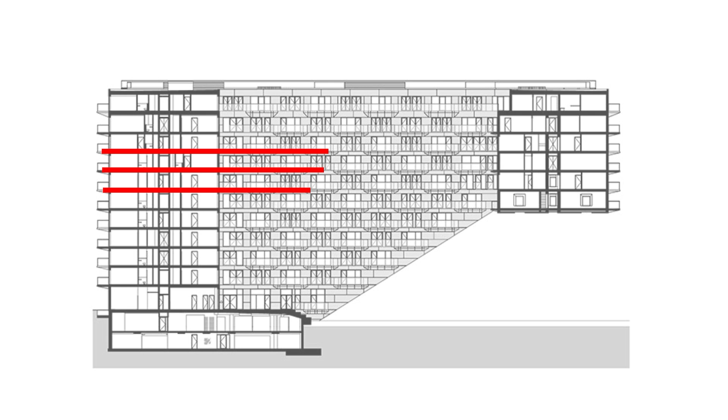Sluishuis features a massive cantilever structure in which 52.2 meters of the total 86-meter cantilevered wing is open without any support below. To support this enormous cantilever spanning 11 stories with relatively short supports, Sluishuis adopted a unique structural system rather than resisting the enormous loads simply through the bending strength of horizontal flanges.

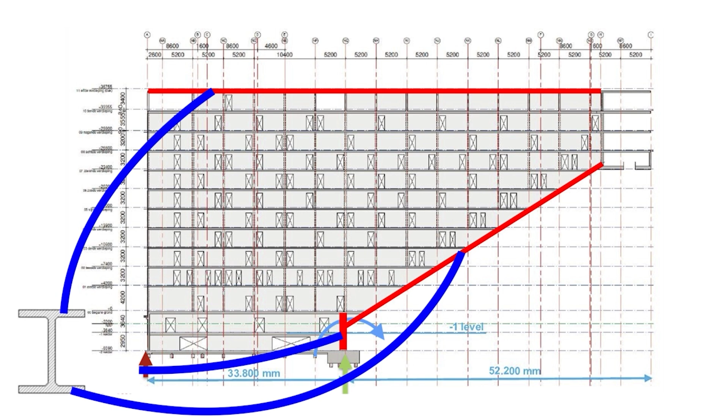This method allows the cantilevered section to behave as one giant H-shaped bending member, where each floor slab acts as the flange and the central double shear wall acts as the web, enabling the entire structure to function as the bending system. In this system, the structure serving as the lower flange is designed as an inclined strut, which provides significant advantages in resisting moments.

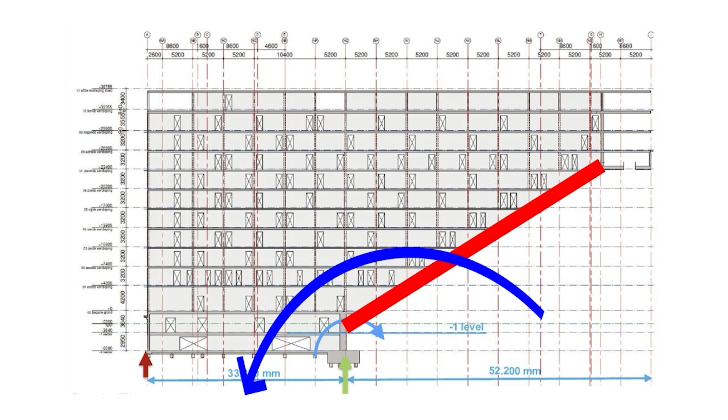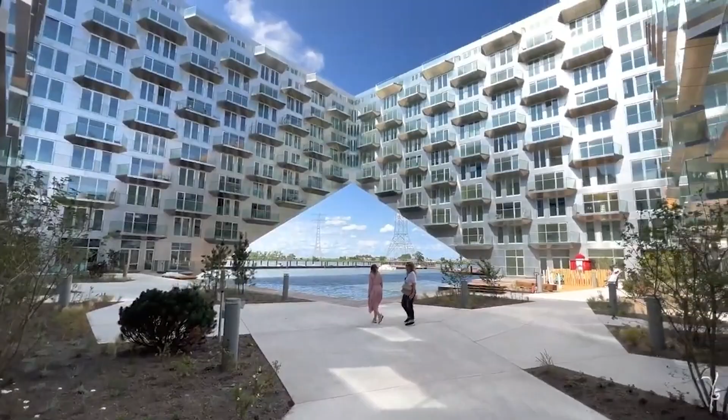While this form was also part of the architectural strategy to create an opening, it affords substantial structural benefits both at the individual floor level and in the overall system.

If the struts in Sluishuis had been merely curtain walls for design purpose, each floor would have had to resist a 5.2-meter cantilever load without support underneath. In lower floors, where cumulative loads from upper levels concentrate, this would have led to intolerable structural burdens.

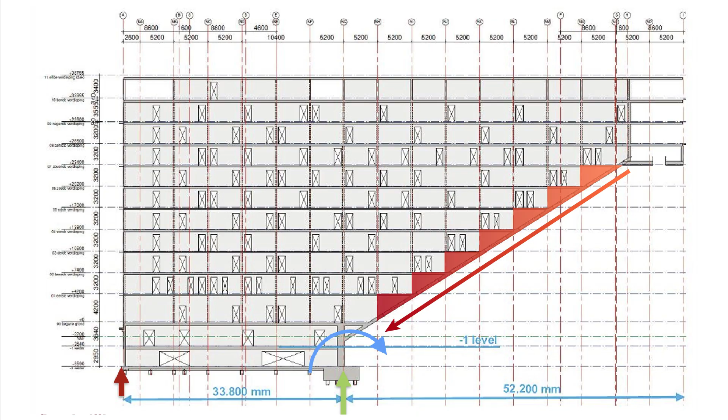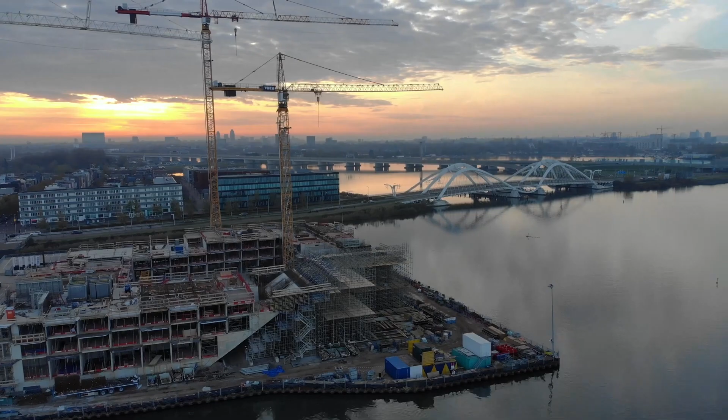Sluishuis employed a distinctive structural approach without wasting the inclined plane by utilizing the slope as an active load-bearing member. The struts are inclined at 31.61 degrees from the horizontal, transmitting loads downward at an angle as both horizontal and vertical forces. Since the struts are part of the cantilever, they inherently act as flexural members.

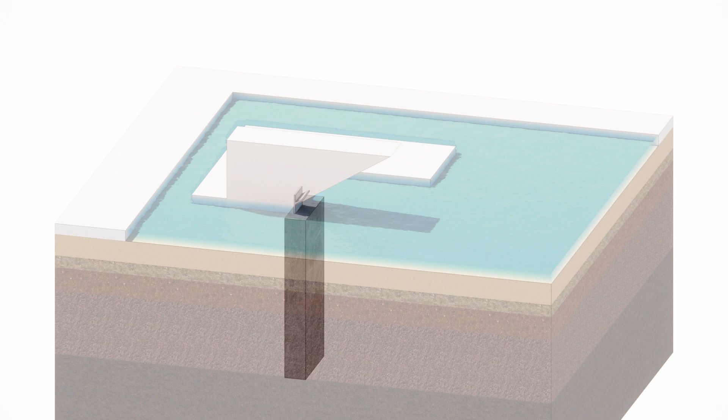However, due to their inclination, they do not rely solely on shear and bending resistance. They also transfer loads downward through axial forces, thereby acting as compression members as well, a hybrid structural role.

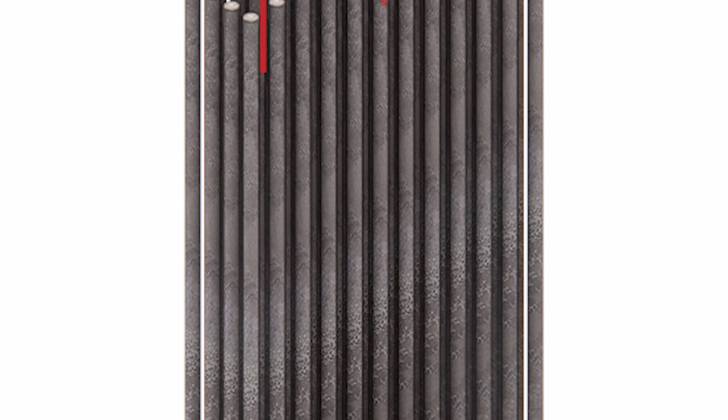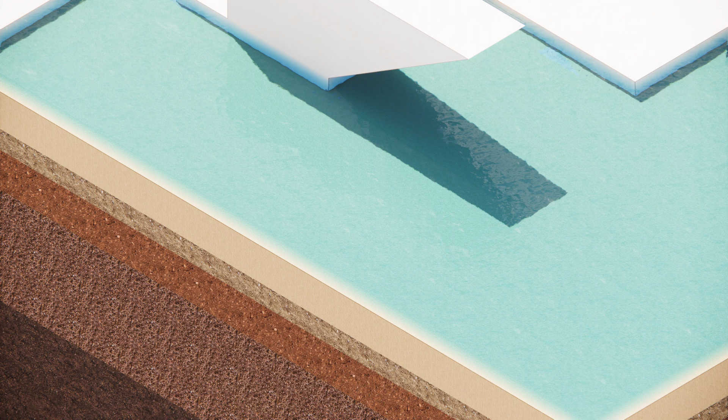The compressive forces and moments transmitted along the struts are further transferred to the massive underground shear walls and footings previously described, which ultimately convey the loads through the compression foundation system composed of steel pipe piles. This forms the load-bearing mechanism that supports Sluishuis' cantilevered section.

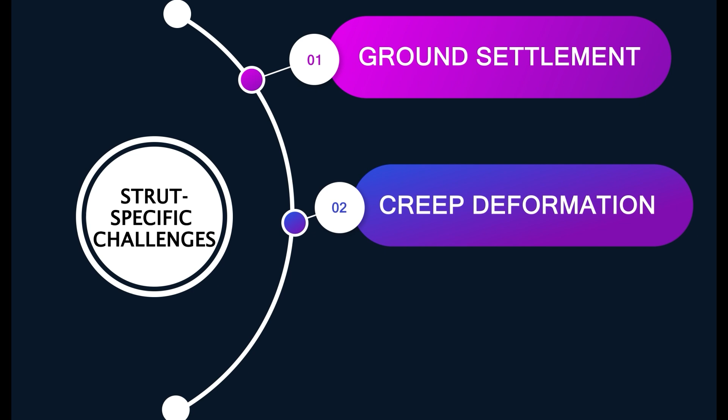While the struts offer significant structural advantages, there are unique challenges, such as ground settlement of the support structure during construction, long-term deformation due to creep, and deflection from self-weight. Careful design and meticulous construction were essential to address these issues.

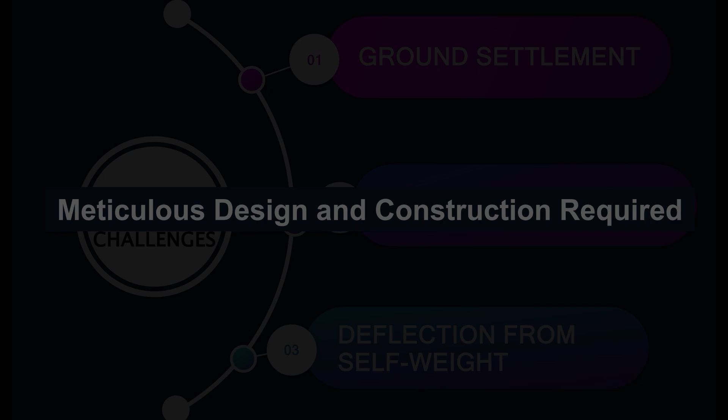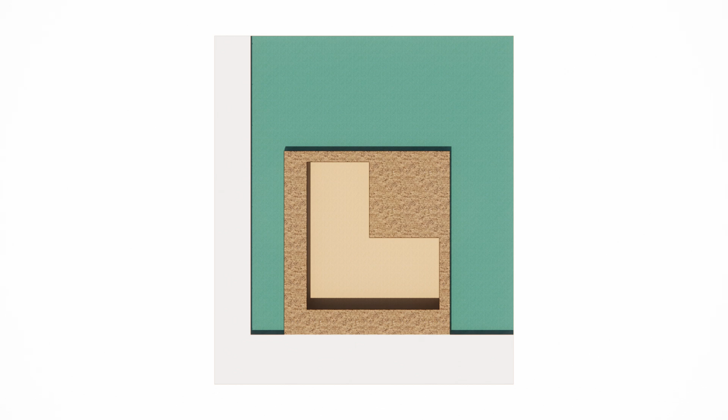Since the cantilever of Sluishuis is located outside the L-shaped underground structure, it was constructed on a temporarily reclaimed ground between the inner cofferdam and the outer cofferdam used for underground concrete placement. As Sluishuis created an opening by lifting a corner of the initially square-shaped site, temporary ground was constructed in the cantilever area and the central courtyard.

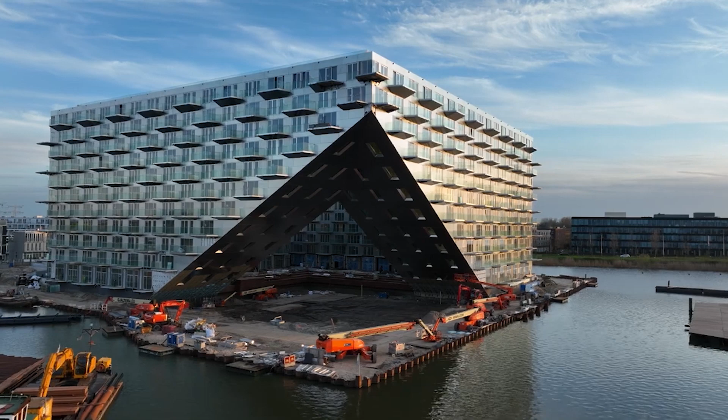This allowed the above-ground structure to be built. This reclaimed ground provided a working platform for casting and crane installation, as well as passages for equipment and vehicle access. Inside the inner cofferdam, a total of 805 precast piles and steel pipe piles were installed.

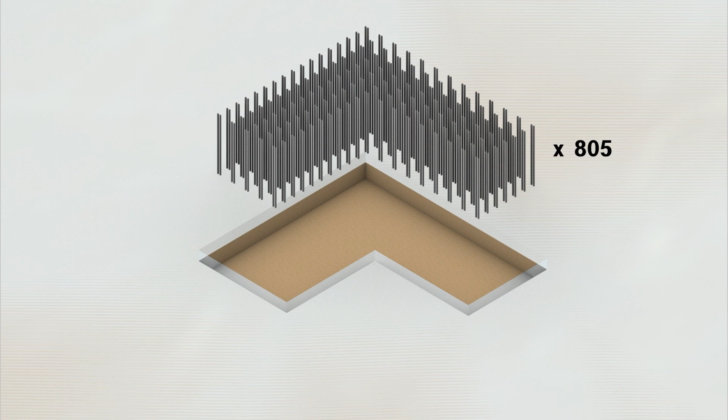Additionally, about 70 temporary steel piles were installed outside the inner cofferdam at the virtual location of the cantilever section, taking into account the upcoming construction process.

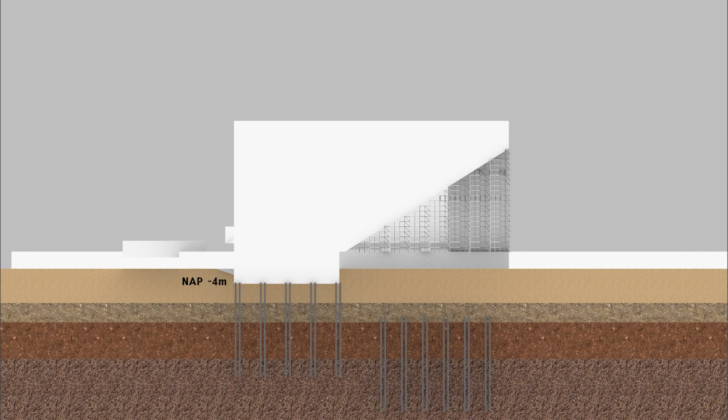While the structural piles installed inside the inner cofferdam were embedded at NAP-4 meter to connect with the B2 basement structure, the temporary piles were installed to withstand the loads during the cantilever construction, with their heads positioned at Sluishuis ground level, NAP -2.2 meter.

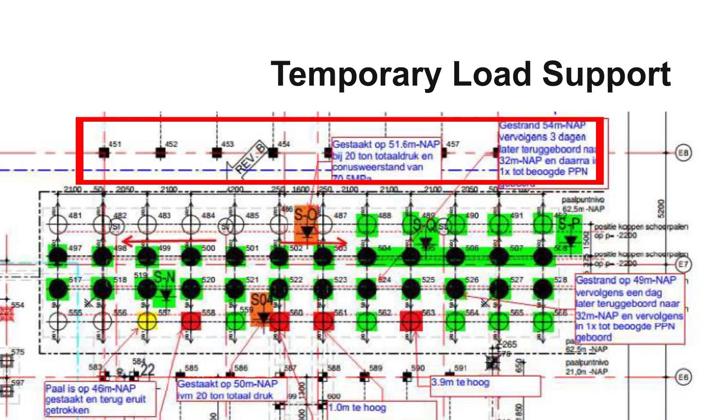These temporary piles were installed at approximately 2.1 meter intervals and were later integrated with temporary structures to support the loads during the strut construction process. Afterwards, sand was reclaimed via barges, completing the temporary ground needed for construction.

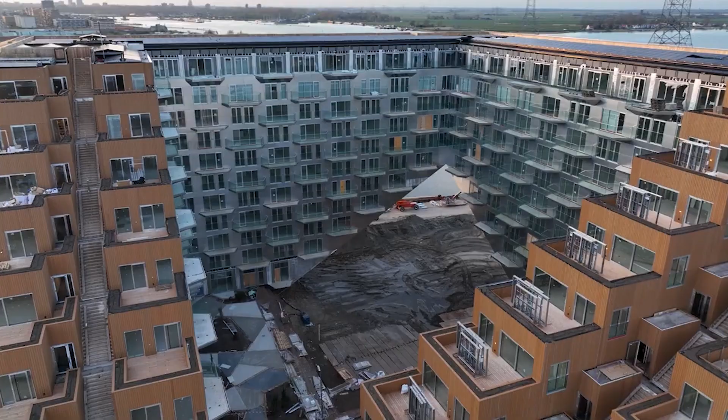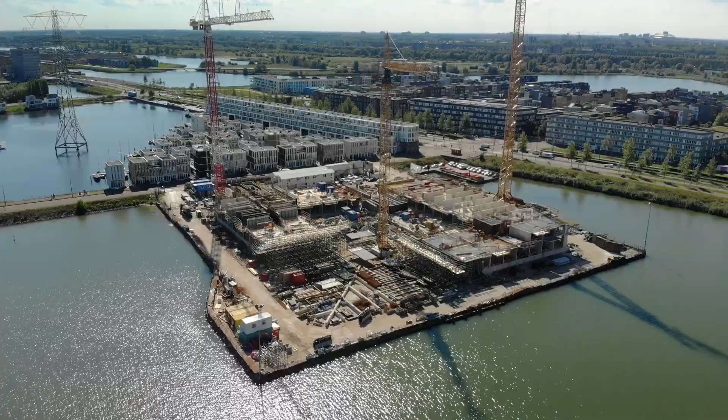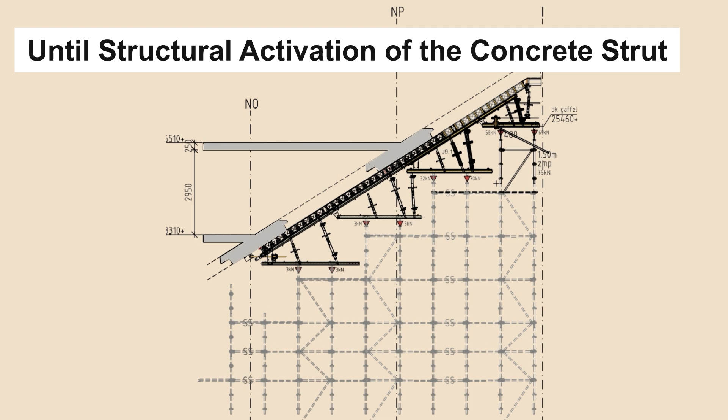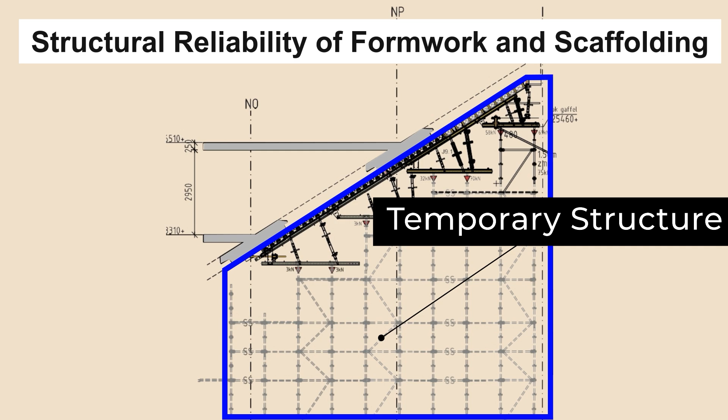To stably transfer the massive scaffold loads supporting the cantilevered walls on the weak ground, a temporary grid of reinforced concrete beams was constructed at the base of the site. Since the formwork and scaffolding had to function as a temporary support structure until the reinforced concrete struts reached sufficient maturity and could act structurally, ensuring their structural stability and strength was essential.

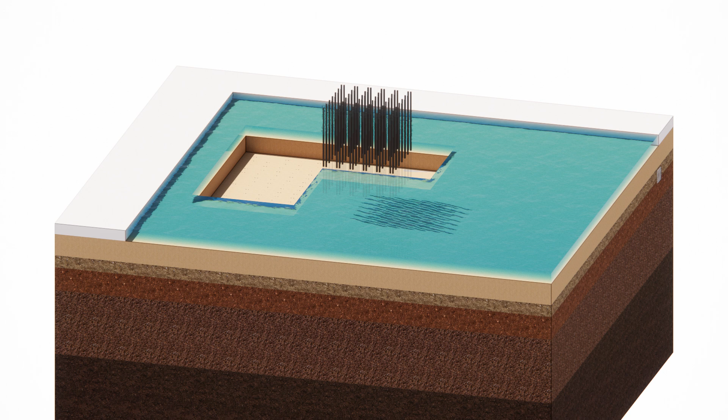However, the soft ground and temporary sandfill were insufficient to bear the loads descending from the scaffolding. Therefore, temporary piles were installed.

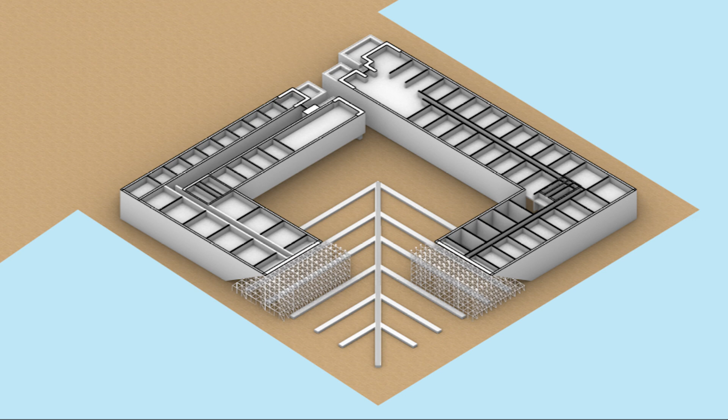To transfer the loads from the scaffolding to these piles, a grid-shaped foundation was cast on top of the previously constructed sand-filled ground, with temporary piles consisting of transverse, longitudinal and diagonal beams arranged in alignment with the direction of the compression shear walls. These beams were arranged in a staggered L-shaped pattern at 5.2 meter intervals, corresponding to the spacing of each cantilever floor, and diagonal beams tied the entire system into a unified structural grid.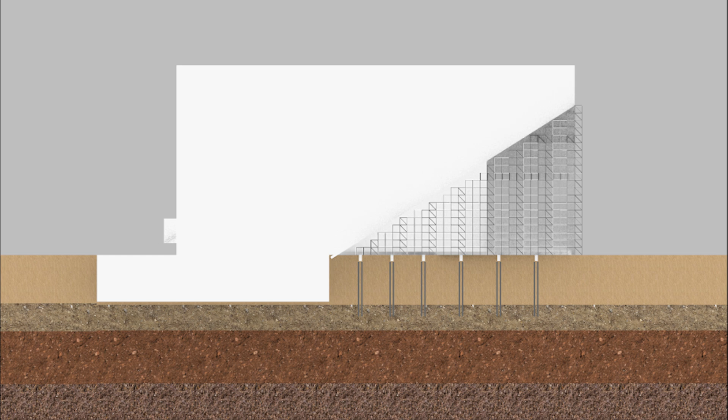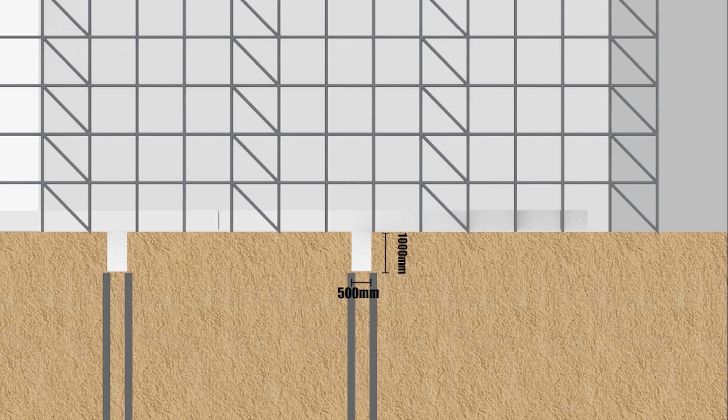This system dispersed the concentrated point loads from the scaffolding over a wide area and transmitted them to the temporary piles. The grid beams were large reinforced concrete members with cross-sectional dimensions of approximately 1000 by 500 mm, cast in place on-site. The beams were laid orthogonally to form a grid mesh, and beneath the two lines of cantilever walls, this grid structure was rigidly connected to the densely spaced temporary pile heads, providing stable support.

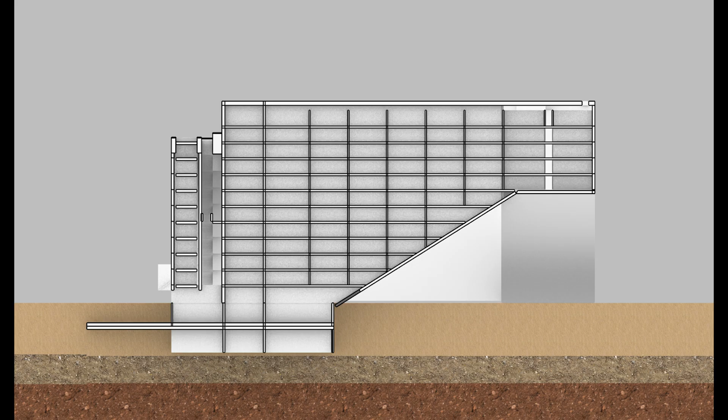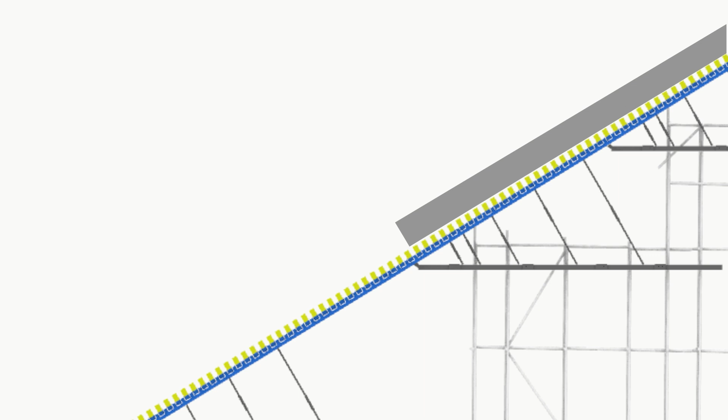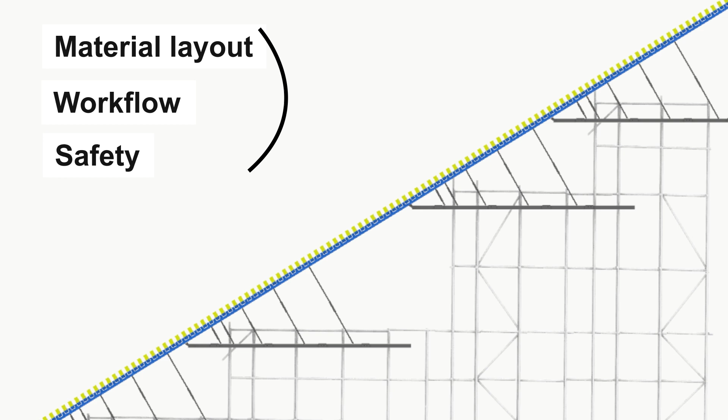The cantilever struts of the Sluishuis were constructed by dividing them into horizontal layers corresponding to each floor and casting them sequentially along these sectional zones. This method was adopted to prevent the possibility of concrete sloping downward due to its self-weight during casting on inclined struts, and to efficiently manage material layout, workflow, and safety in a challenging environment where the inclined structure had to be built without any supporting structure beneath.

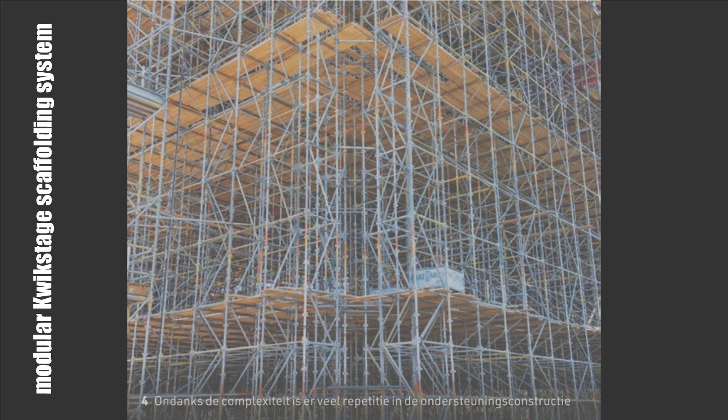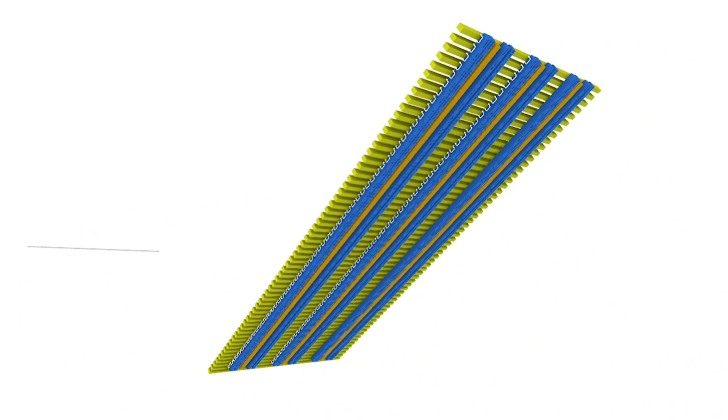In line with this sector-based construction method, the strut formwork utilizes a modular Kwikstage scaffolding system and Doka's Top 50 modular formwork. The Doka Top 50 is a modular system that can form large formwork panels by combining standard components such as H20 timber beams, steel walers, and plywood, depending on site conditions. These Top 50 formwork panels were fabricated to match the shape of the inclined walls and installed on a special inclined frame called the jukan.

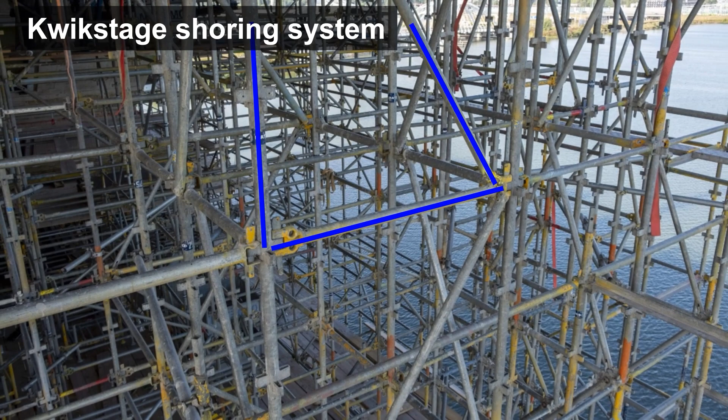To support the cantilever walls, large temporary scaffolding was erected. Unlike typical architectural scaffolding, this served as a shoring structure, a medium to heavy-duty load-bearing system. The Kwikstage shoring system used in the Sluishuis project was a modular scaffold where horizontal and diagonal members can be quickly connected to vertical members.

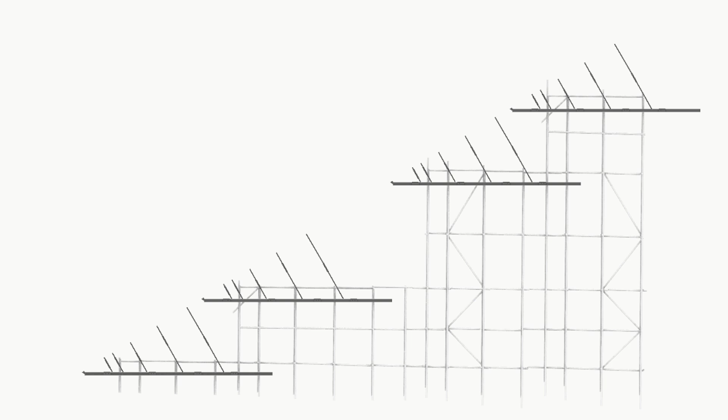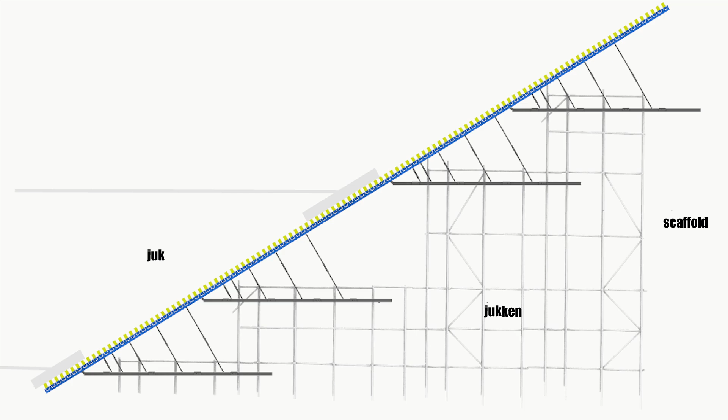Sluishuis employed high-strength Kwikstage components using S355 grade steel for scaffolding members and thick steel pipes to enhance rigidity. As a result, even very large loads could be supported with relatively few scaffolding members, and stability was ensured so that allowable loads did not decrease even with increasing scaffold height.

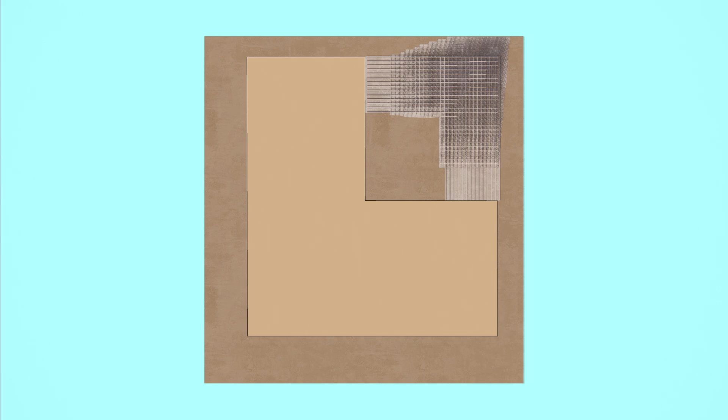This supporting scaffold structure was built in steps, following the shape of the cantilever wall. Scaffold towers were erected in a grid pattern on the horizontal plane, and as they rose upward, some sections were set back step by step to match the slope of the cantilever walls. Since all scaffold members were connected in a regular modular system, a consistent pattern and spacing were maintained throughout the large structure, making it possible to relocate and elevate previously used modules for reuse.

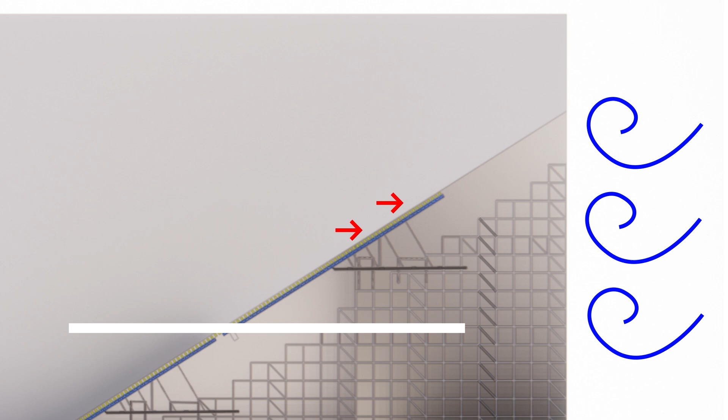Braces were installed throughout the structure to resist lateral forces from wind or the self-weight of the struts, and at the base, additional steel reinforcements and connections were applied to prevent buckling.

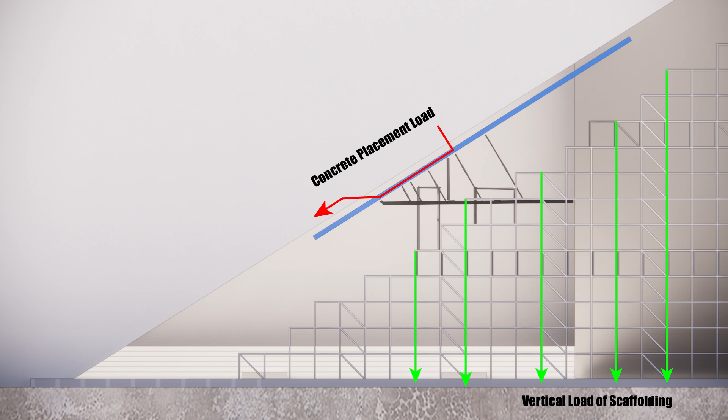Additionally, during casting, the formwork support frame was anchored to the previously cast inclined wall, which enabled the horizontal loads generated during concrete pouring to be transferred to the existing concrete wall rather than the scaffolding. As a result, only vertical loads acted on the scaffolding itself, allowing for stable load support without bending moments or additional settlement. Beneath this scaffolding system, as previously mentioned, temporary reinforced concrete grid beams were installed on top of the sand reclaimed ground to widely distribute the loads.

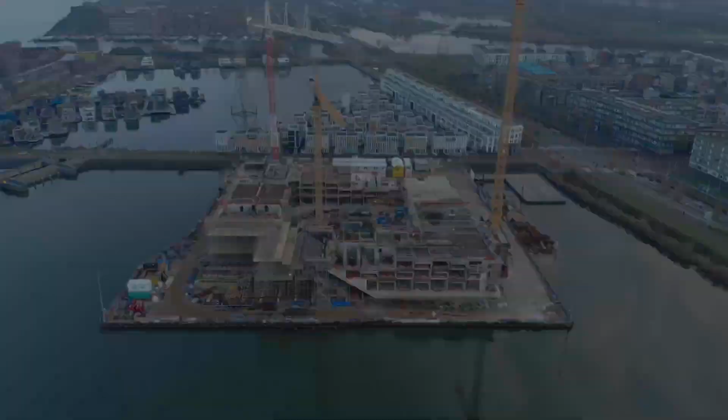By thoroughly reinforcing the entire load path from the foundation to the upper formwork, the structural stability of the scaffolding system supporting the massive cantilever was ensured.

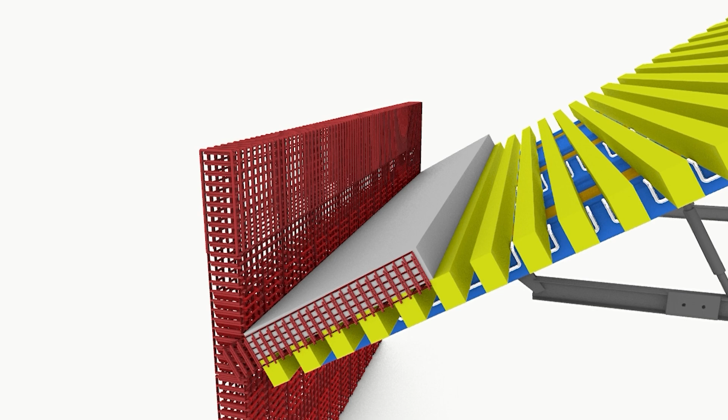Due to the nature of the inclined structure, the concrete was cast in multiple stages to form horizontal layers. The casting process was divided into the slab joint areas and mid-wall segments so that each pour would form a horizontal surface. The internal space of the formwork was sectioned accordingly, allowing the concrete to be poured sequentially in a controlled manner.

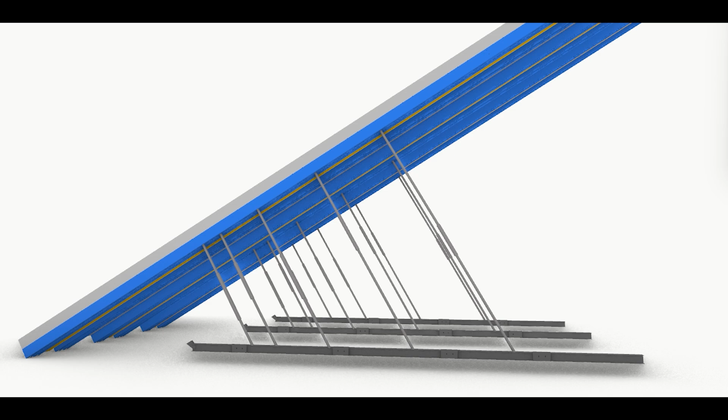This method prevented the concrete from flowing down the slope and ensured stable placement. Furthermore, the construction joints were kept in a moist state to allow for monolithic bonding between pours. Once the lower portion of the wall gained sufficient strength, the formwork was removed.

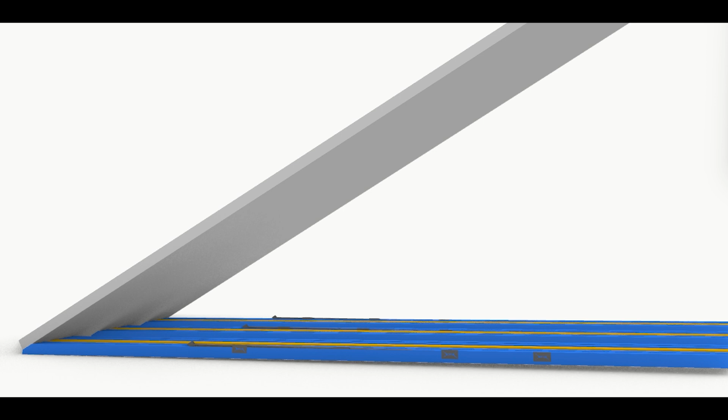This was done by loosening the threaded jack spindles of the jack support frame to create a gap between the panel and the concrete surface. Then, the entire formwork panel was lifted using a crane or similar hoisting device and reused for the next section of the wall.

After lifting the formwork to the height of the next story, the support frame was reassembled on the scaffolding and the formwork was installed once again. At this stage, the support frame for the next sector was anchored to the already cast inclined wall below. This anchoring ensured that the lower inclined wall would resist the horizontal forces generated during the upper level concrete pouring.

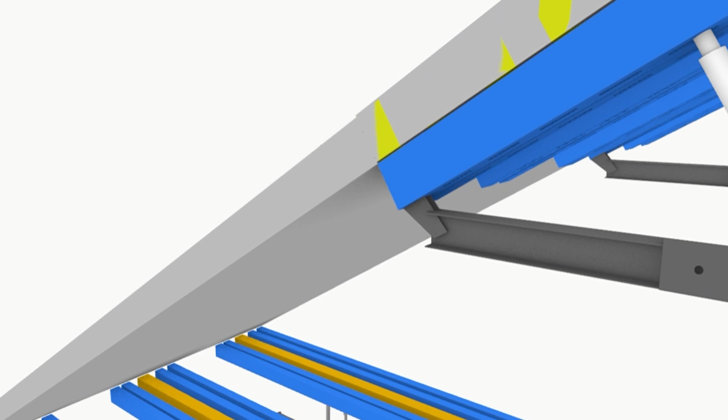After adjusting the position and angle of the formwork with precision and completing the reinforcement, the concrete was cast for the next story. This process was repeated step by step for each subsequent layer of the inclined cantilever wall.

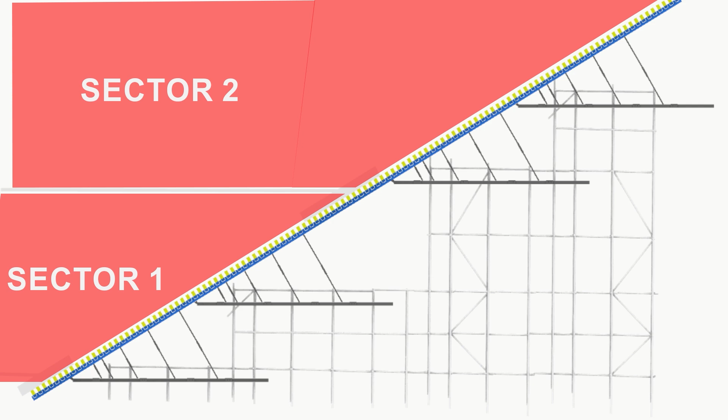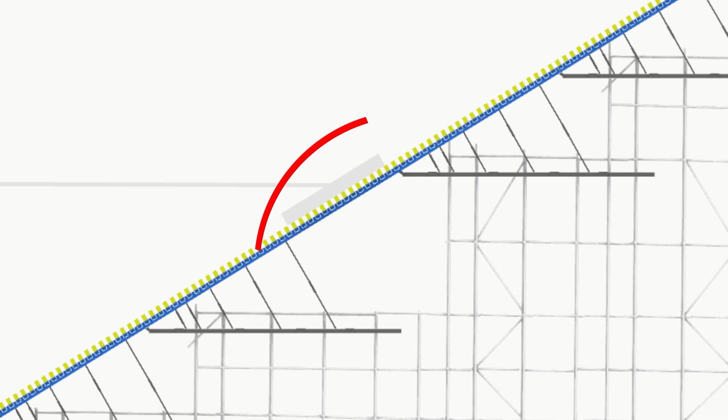To accommodate the construction process, the inclined wall was divided and built in sectoral units corresponding to one story each. However, this division led to construction joints at its interface, which could potentially pose structural problems. Given the enormous axial forces and moments borne by the struts, it was essential for the structure to behave as monolithically as possible.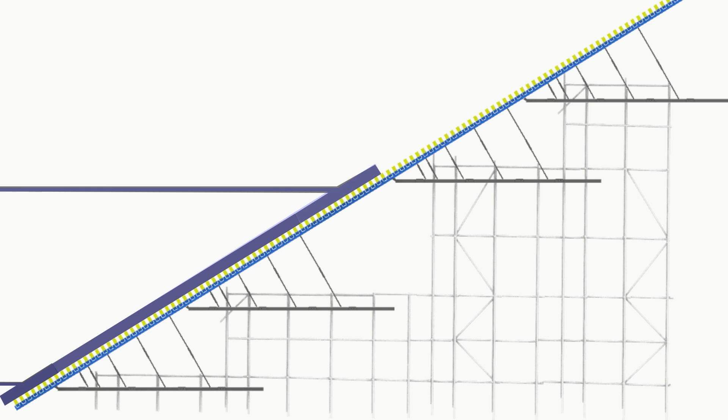Therefore, the contractor meticulously planned the process so that the next section of the inclined wall would be cast while the lower section had gained partial strength but remained in a moist state. This approach maximized continuity and ensured the best possible level of monolithic behavior between sections.

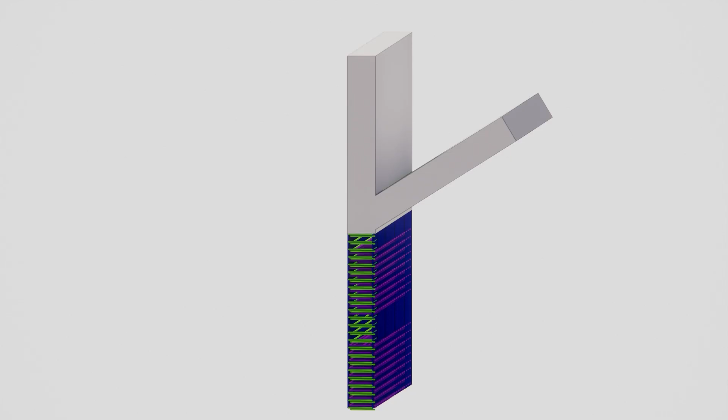In addition, supplementary reinforcement was provided to strengthen the potentially weak construction joints. Because the struts are inclined at 31.61 degrees from the horizontal, the loads transmitted along the axis of the strut include a horizontal component greater than the vertical one. This horizontal force could cause shear failure at the relatively weak construction joints.

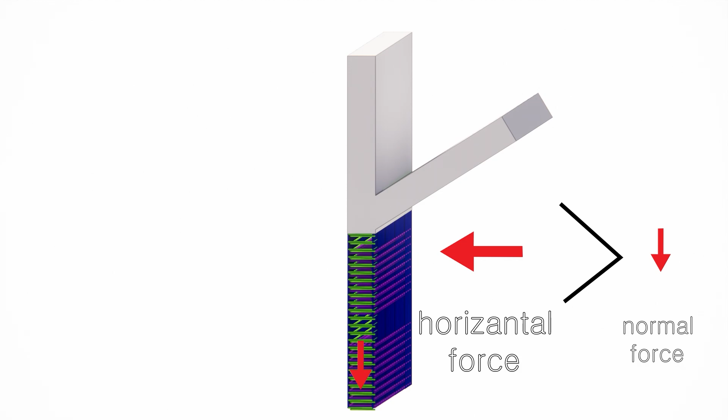Especially those cast in horizontal layers such as slab interfaces. While the main longitudinal reinforcement in the strut resisted some of the shear, and the joint surfaces were intentionally roughened to increase frictional resistance, these measures alone were not sufficient. Therefore, shear reinforcement was added.

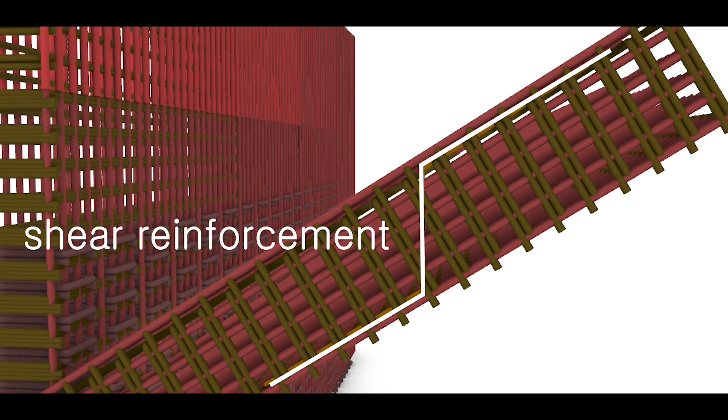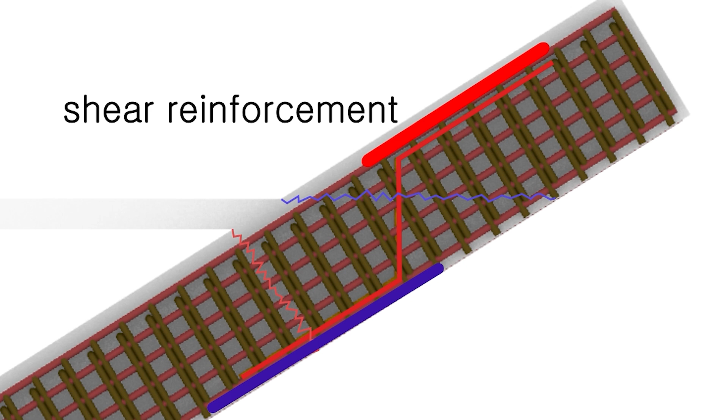For ease of construction, the shear reinforcement was arranged vertically. It was bent into a Z shape, wrapping around the bottom horizontal reinforcement, and then extending upward to wrap around the upper horizontal reinforcement. In this way, the shear bars penetrated the joint vertically and resisted shear failure caused by horizontal forces.

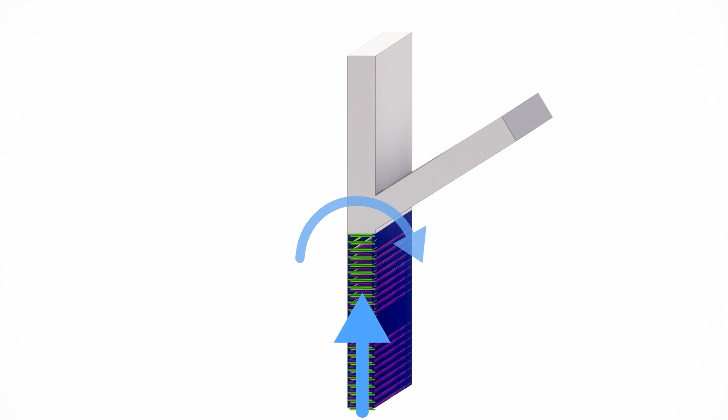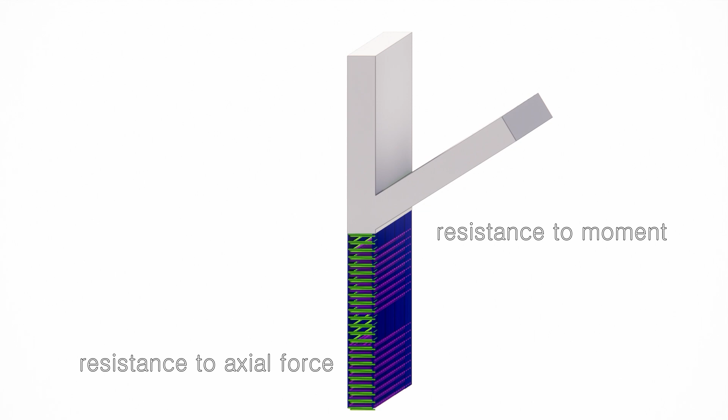Emerging diagonally at a 31.61-degree angle at approximately the mid-height of the underground compression shear wall, the cantilever struts previously described act as a hybrid structural element, functioning both as bending and compression members. Due to this dual role, a large amount of both vertical and horizontal reinforcement was installed.

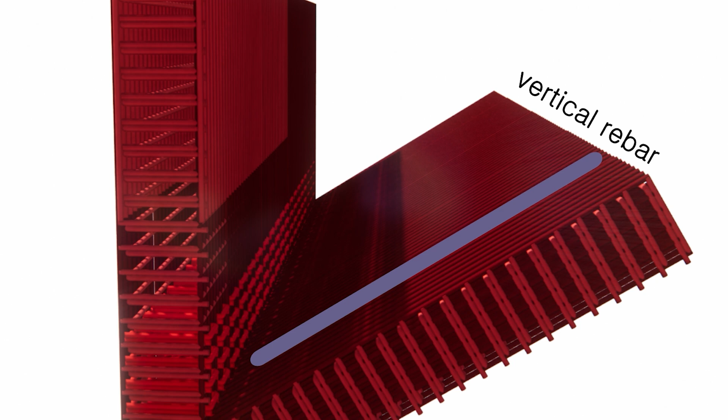The vertical reinforcement consisted of D32 to D40 rebars, and the horizontal reinforcement used D22 to D25 rebars. Within the 400mm thick struts, the thick vertical rebars were positioned toward the outer faces, while the horizontal rebars were arranged internally. These horizontal rebars were grouped into bundles with ties to produce a confinement effect, helping to prevent strength degradation within the strut due to deformation, thus improving the structural integrity of the elements.

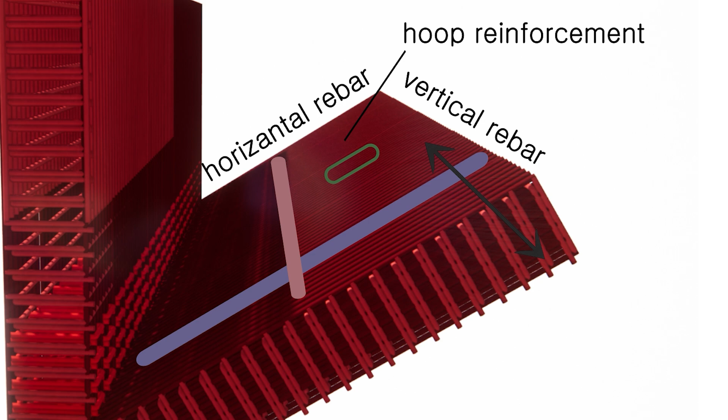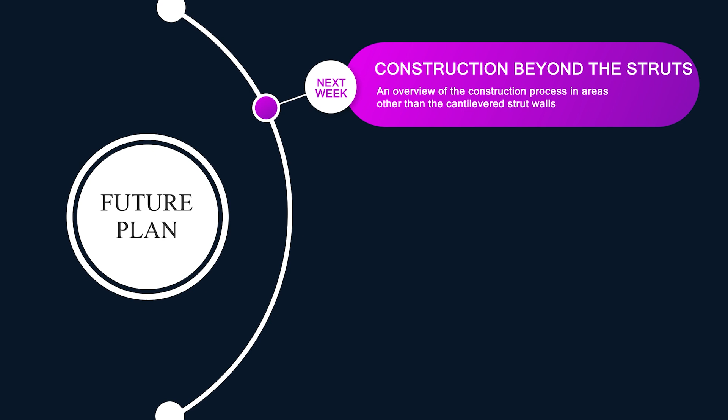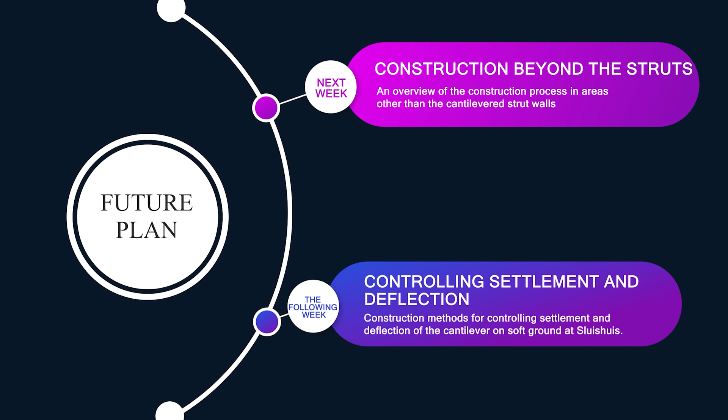Next week, we will cover the construction process of the other areas, excluding the cantilevered strut walls. The following week, we will focus on the construction methods used to control the settlement and deflection of the cantilever structure on the soft ground at Sluishuis.